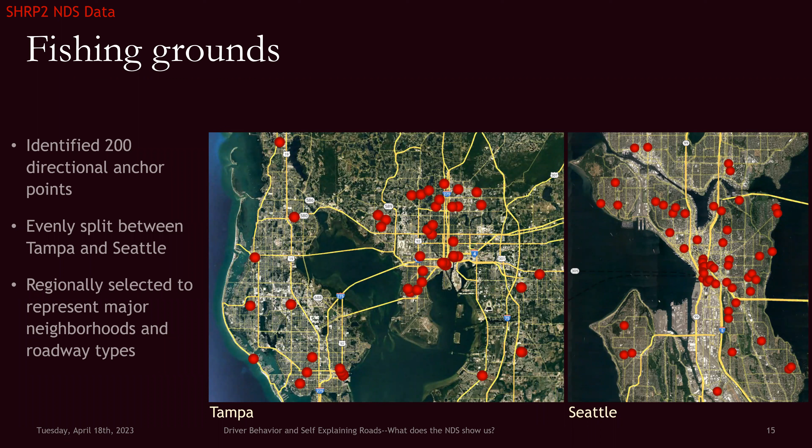And so we picked 200 locations, 100 in Tampa and 100 in Seattle. And we selected them regionally, 3 points in each major neighborhood: an arterial, a collector, and a local street. We tried to pick the mid-block as far away from signals as we can get them. 1 point in each direction, so we're not catching behavior in one direction and not the other.

And we asked them to give us the data for 10 drives in each location, the 10 that were the closest to the 85th percentile speed during the daytime, or at least the active time. We wanted to see what the environment was actually causing the driver to choose, not what the transient behaviors would be. Say if there was a pedestrian that randomly crossed their path, or if they had to stop at a stoplight, we wanted to see as close to free flow as we could get.

And they gave us 1 second of data, which gave us 10 readings during that second. And we asked for 2 attention variables. The first one was 10 times a second, tell us, are they on task or off task? If I were doing this again, I probably would have done 3 seconds, not 1. But essentially, it's eyes on the road. Are they looking at the roadway or at their mirrors, or are they looking around at something else?

And then multitasking. So they'd give us a high-level list of what tasks they were doing. And we actually counted the number of tasks. We'll talk about that in a minute. And then on a whim, we asked, are there vulnerable users present in that environment as they're driving through? Didn't realize at the time how important that would be.

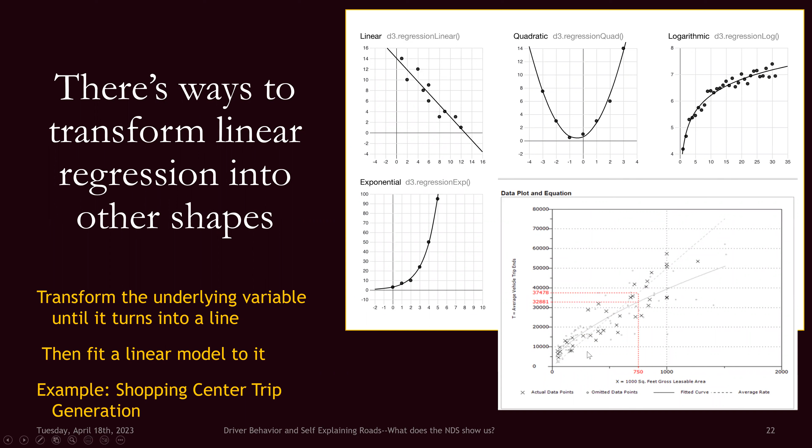But that's not the only tool in our toolbox. You can also use something called an econometric model. And these models use an S-curve. And in the most general sense, they're trying to identify the difference between someone choosing yes or no.

You can actually extend that to different levels of yes or no, but essentially you're trying to figure out whether a person, given a whole bunch of information and a whole bunch of things to decide from, they've got one choice to make, but a lot of factors that are going to go into that choice. Are they going to decide yes or no?

And so this is the kind of thing that tells you whether or not you've hit the straw that broke the camel's back. So as you go along the line, you're ending up adding up those factors. And at some point, you begin to get high enough that you go from a no to a yes. And those are the kinds of things that when you add factors together, you can see how the variables interact.

Now, a multivariate analysis is a lot like icing a cake. The type of cake you have determines the type of frostings and add-ins you're going to put with it. If you've got a very simple cake, you want a really rich, intense icing. If you've got a complex cake, you want a very simple, just sweet icing, but not nearly as complex because you don't want to overshadow the cake. And you're always looking to see what flavors would balance it out to make an overall presentation.

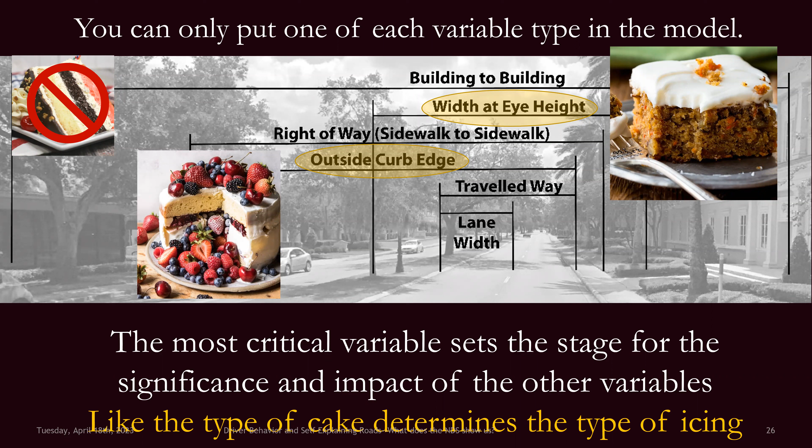So sometimes when you have a very simple variable that's the base of your model, you can actually see the other pieces that add up to it. But if you have a very complex variable that starts your model, you don't end up with anything else showing up as significant. And that's one of the things that we faced. So a lot of the models I'm going to show you next are really very simple outside curb edge models. And we're going to start with time on task.

So remember, we asked them, is the driver focused or not 10 times a second, okay, at that 1 second mid-block. And at first we thought we were measuring the driver's attention, but it turns out we were just measuring whether the driver had their eyes on the road. And the biggest clue to that is that when you have a person in the environment, a vulnerable user, the attention that the driver gave dropped just a little bit, not a lot, just a little, but it was very significant. It was always happening.

And what we're seeing here is that drivers' eyes are drawn to the people that are in the space. Now, they don't always see it, but they do get drawn to it when they do. Local streets get less attention than arterials and collectors. They also have more conflicts. And so you end up having to focus on more than just the roadway when you're in a local street. This is kind of a duh. As the roadway gets more complex, you got to keep your eyes on the road more. That's very simple.

On-street parking dropped the time on task. And that's because drivers are actually looking to see if somebody's going to jump out between the cars or if the cars are going to start moving out. And so they're looking at more than just the driving task itself. They're actually paying attention to the things on the side of the road. And that's a good thing. It's just a complex thing.

So when you're looking at this, we took every single variable and we did an individual statistical analysis for each variable by itself. So how does the drive lane width relate to time on task and multitasking? And then also, how does that variable predict whether or not you'd have a vulnerable user in the space?

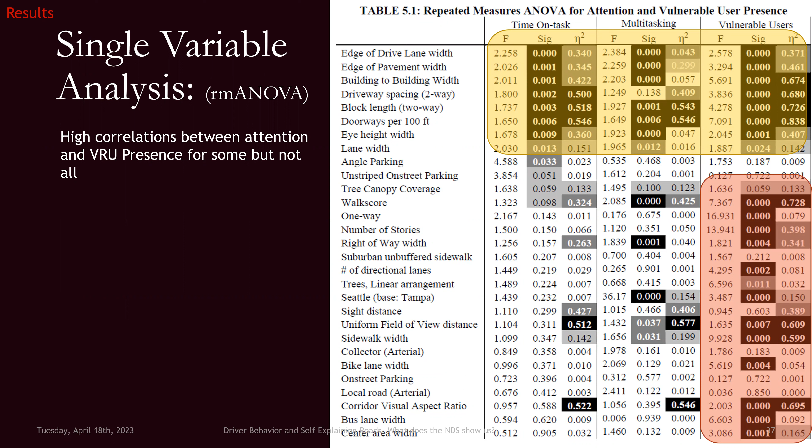And then we lined them all up, so we're looking at them all together. And there were a whole bunch of things at the top that moved together. And a lot of them were very visible, but not all of them. So there were high correlations between attention and vulnerable user presence for some things, but not for all things. Just because you had vulnerable users there when that variable was high didn't necessarily mean that variable changed your attention level. And that was really puzzling.

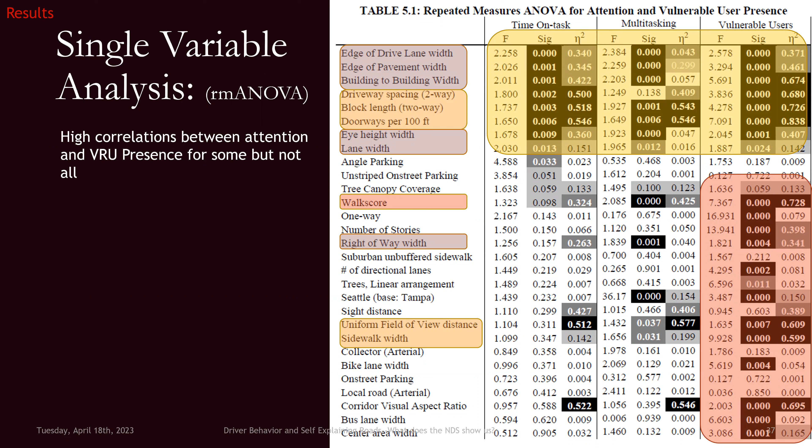So why would it matter sometimes and why wouldn't it matter other times? Things like walk score don't actually have anything to do with what the environment looks like, and yet it seems to have a really big impact across the board. So I was talking with a friend of mine trying to ponder through what all this data meant. He's a practicing psychiatrist, and he drops this bomb on me. He says, well, you know, most driving's in a hypnotic state anyway.

I'm going, we talked about highway hypnosis in the 60s, but that was a very long time ago. And highway hypnosis was really an impact on fatigue. We kind of discounted it. So what are you talking about? I know you're not talking about fatigue. What is it that you think that's important about hypnosis? Well, he said, go look up what hypnosis actually is. So I dutifully went and looked it up.

And it turns out when a person hypnotizes you, it increases your ability to pay attention to what they cued you to, but without watching yourself do it. So when the guy says, every time I say this word, cluck like a chicken, your brain decides it's going to watch for that word at a really, really high level, but it's going to turn off your ability to actually watch yourself watch for the word. And that's exactly what you do when you're driving. When you're driving, you quit watching yourself drive.

And it turns out there's two levels of watching yourself. One of them that we normally think about is something called higher order thinking. And it's very tied in with words. So you know you're watching yourself. It's very logical. It's very processed, and you remember it. But there's also a level of metacognition, watching yourself, that's called phenomenological. And it's basically watching yourself see things, but it's not necessarily talking to yourself about it. It's all about monitoring and your sensory perception. You can ask yourself, or someone can ask you in the moment about it, and you'll be able to answer questions about it, but you won't be able to remember it later.

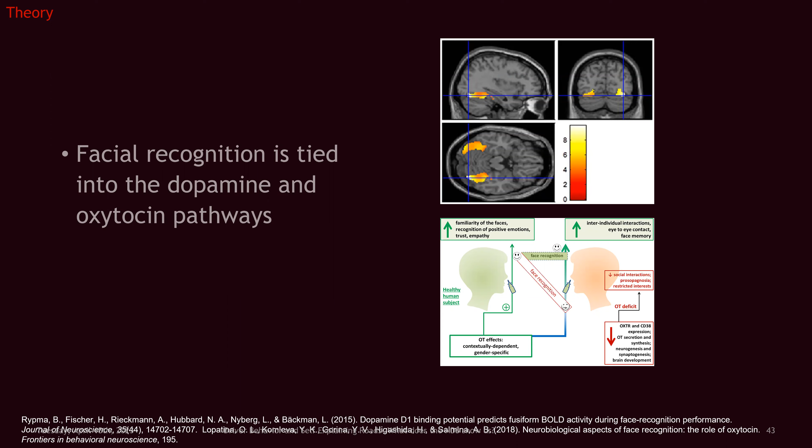You see faces even when they're not there, and we get rewarded when we see faces even before you're conscious of them. So the wave that we see in brainwave patterns that corresponds to recognizing that something is a face happens at 170 milliseconds. Conscious thought doesn't start until about 300 milliseconds. And it turns out if it's your own face, you only need 20 milliseconds to actually get the dopamine hit tied to seeing your own face.

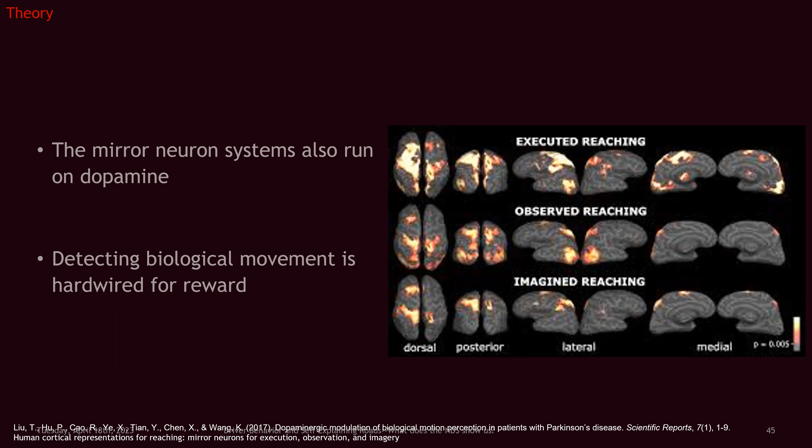That mirror neuron system also runs on dopamine. That's the system that when you raise your hand and wave it at somebody, there's a part of their brain that will actually raise a hand and wave it so you can decode what that person did. That's how babies learn empathy, because when their mom smiles, that mirror neuron system causes them to make the exact same facial expression. And when they make that facial expression, they feel internally what the mom feels, because facial expressions are hardwired. You feel the facial expression you make. And so these are very, very primitive, very biologically critical systems that all run on dopamine.

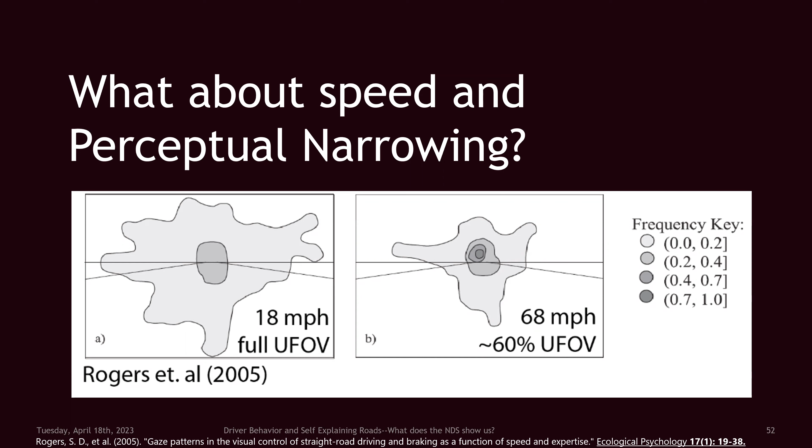So we know that the faster you drive, the narrower you're looking. You're not looking at as much of your visual field. Well, when we take this into plan view, it turns out the people who did the research never actually considered how far ahead the driver was actually looking. So if you're only going 18 miles an hour, you're not going to be looking that far in front of you. But if you're going 50 or 60, you're going to look a whole lot farther down the road.

And those shapes correspond to a different width in the roadway. So when we put that in a plan view, it turns out no matter how fast you're going, you're still basically looking at a 60-foot wide corridor. Even at 68 miles an hour, you're still narrowing your cone of vision out to a 60-foot wide corridor. That's a very interesting thing to me.

And there's a speed issue too. So if you're going too fast, it actually takes time. Remember, we said it took 170 milliseconds to process a face. It takes time to process human presence. So if you're going too fast, there's not enough time to process that there's someone there. And we think that limit is around 40 miles an hour.

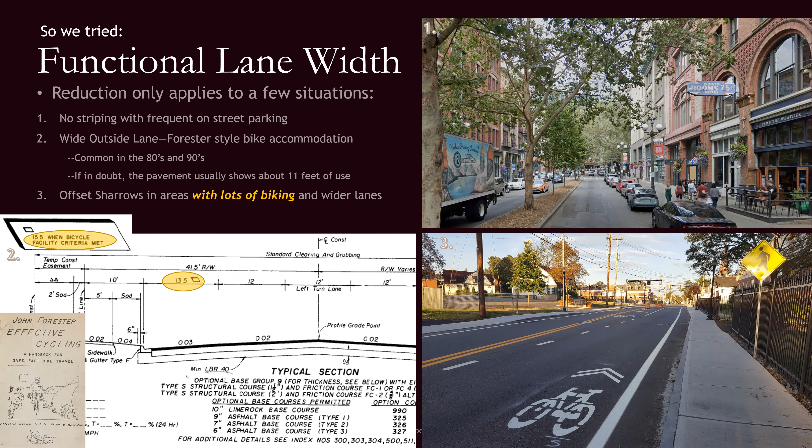So we quit doing those kinds of things very, very early on, sometime in the 80s or so. We quit doing these wide outside lanes by the 90s, but they still exist out there. And when you take into account where the driver is actually placing their vehicle, the curve now goes in the right direction. Doesn't go solidly in the right direction, but now, as the lanes get wider, we actually see people going faster, which is what we recognize happens in real life.

Now, I'll tell you, suburban drivers usually use every inch that you give them and a little more. So once you get to about 11 feet, the driver in suburban or urban environments, they're taking the whole lane. So if you're narrower than 12 feet or 11 feet in your striping, they're taking the whole lane. But suburban drivers tend to take the whole lane regardless. They're just all over the place. They really don't put themselves in one unique spot.

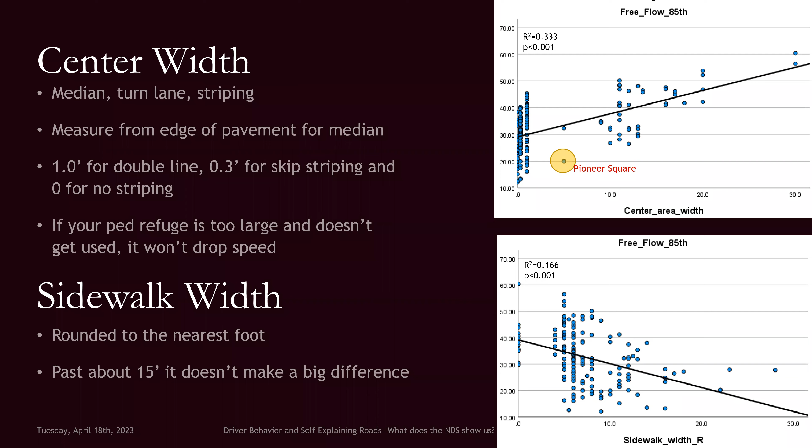In terms of longitudinal measures, we're talking here about the interaction of time and space. So how does the corridor present itself to the driver as the driver is moving along in time? Block length was the measure that made the biggest difference. And you can measure block length two different ways. You can look at the blocks that are just on the right side of the road, or you could look at it in terms of the conflicts that the driver is going to see from either side.

Well, it turns out that the right side had a better R squared in the formulas, but when we used them in the testing, both directions actually worked better in our back-end testing. I tend to like bidirectional, counting what the potential conflicts are more than just counting what's on the right side of the road, at least for block length. In driveway spacing, it probably works the opposite way, but in block length, you probably need to think about what conflicts the driver is actually getting to.

Some of the things that we saw in the testing were that most signalized driveways do actually act like a side street, unless it's a signal for a school, and then people ignore it entirely. A lot of the firehouse signals get ignored too, because they're just not activated often enough for a driver to worry about whether or not they're there. That's why you do the extra signaling in advance of those firehouse signals, because people will blow right through them. They're not used to actually seeing them activated.

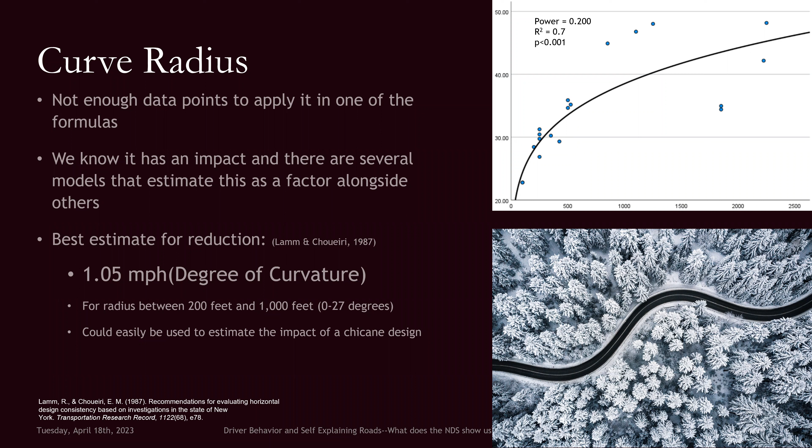I don't have enough statistical strength to put it in my formulas, but it's one of those things that from a physics standpoint, we know the mechanics, we know it's going to work, so you can stick that in the back of your head.

Now, again, I want to remind you that there are people behind all of these. So every single variable that we've been talking about, people really are foundational to that variable. We make a lower posted speed if we think that there are going to be people there. That visual width of the corridor is all about whether or not there's going to be enough people in the space for me to see them. In a small enough space, I can actually physically see them.

Interruptions are often because of people or other vehicles. So those are also really people oriented. And an urban environment is going to have more people in that environment. So every single one of these variables has their own unique impact on the way speed operates, but they all come back to people.

So we tested 3 different equation types. There's a kitchen sink model where you just build as big a model as you can that makes sense and see what matters. And a lot of times you come up with some really interesting things. If I left things like the visual corridor width or the doorway density in those models as I built up the model, they always popped up first and they always stayed in the models the longest.

A scalable model is where we took out the variables that we knew you couldn't use in GIS. And so if you've got only GIS ready variables, what kind of formula can you get? They're not going to be quite as accurate, but they do still work. And then of course, you want to have a back of the envelope projection. So something that's simple enough that if you're standing in a public hearing and you need to give a number off the cuff to a politician, you need to have a number you can give them. We tried to create equations that would actually work that way.

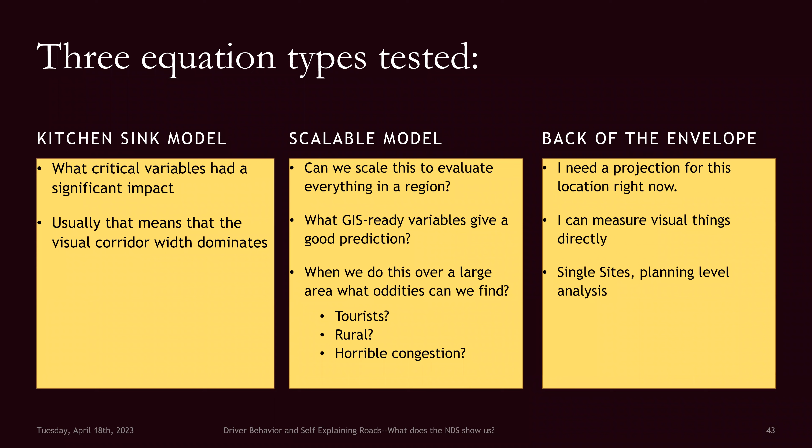So trade-offs, as we were creating all of these equations, and I've done literally hundreds of them now, so I kind of know how the variables interact. In terms of the human presence, vulnerable user probability works the best. And that's good news for me because we really do believe that the likelihood of having a person there is the biggest impact on the way people drive. It's also the hardest thing to measure. So since that's hard to measure, doorway density is a little easier to measure and it gives good results. Not quite as good as probability, but it'll work.

Walk score doesn't change speed as often as we would like it to because it captures the land use mix, but not specifically what's going on in that individual corridor. It does actually matter sometimes, but not nearly as often. It's quite rare that it does.

In terms of other trade-offs, the visual width takes up an awful lot of space in that equation. So that little visual tunnel that people are driving down accounts for a lot of other things. And so if I have to take that out of the equation, I have to replace it with multiple variables, things like the number of lanes and the width between the buildings, the area in the center, the sidewalk width. All of those things are replacements for what is the real variable, how wide the corridor looks.

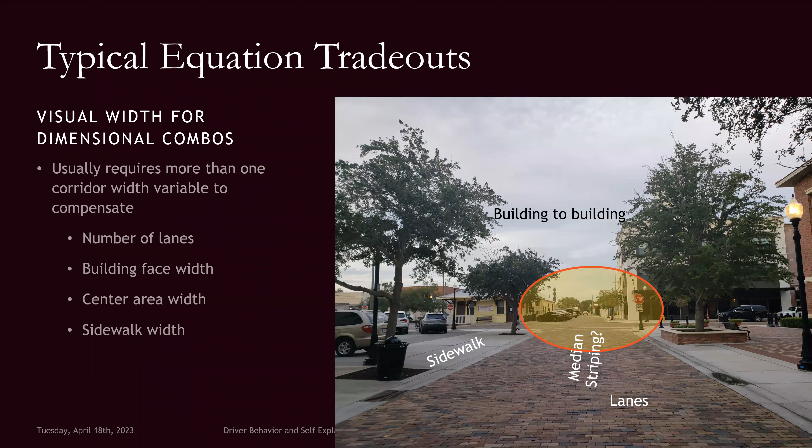You could trade out vulnerable user probability for sidewalk width sometimes. You put wide sidewalks in the places you expect to see people, but you need to think through how well those sidewalks are actually being used. If you just throw a sidewalk in that's really wide, willy-nilly for no reason, and you don't have people there, that relationship isn't going to be as solid.

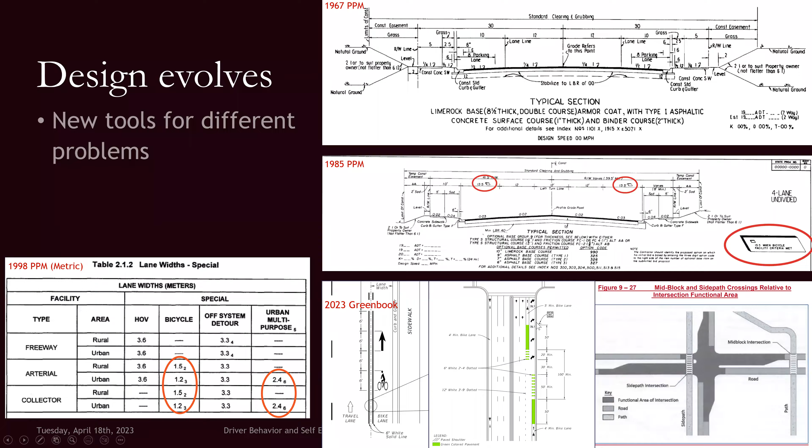But the research basically indicates there's really 2 approaches to managing our drivers. We can use a brute force approach, or we can shape their behavior. Brute force uses the laws of physics. Shaping uses all of the social and psychological principles we've talked about. Brute force is always in the roadway, but shaping takes into account everything that's around the driver. Brute force is a very spot-specific kind of treatment. It works where it works and nowhere else.

When you're shaping the environment and shaping the driver's behavior, everything in the environment speaks, but also it speaks for the length of the roadway. It's not just the one spot. You get an impact over the length of the road. Brute force is also usually very speed specific. It doesn't change the way people pay attention. It doesn't change how cautious they are.

They slow down for the speed table you gave them, and then they speed up in between, and they're not paying attention in either place. They're trying to make sure they don't ruin their suspension. They don't care what's happening on the side of the road. Shaping gives you a speed control, but it also changes the driver's attention and awareness, the focus they have looking for vulnerable users.

When you use a brute force approach, there are almost always negative consequences. When you force somebody to do something, you're going to end up with them pushing back. Not only will they adjust for their speed in between those treatments, but it's going to change your emergency response time. There was a study in Seattle that showed you're losing as much as 6 seconds for every single speed table. And if you have to space them at 350 feet apart and you have 10 of them, you've now lost 60 seconds on your response time.

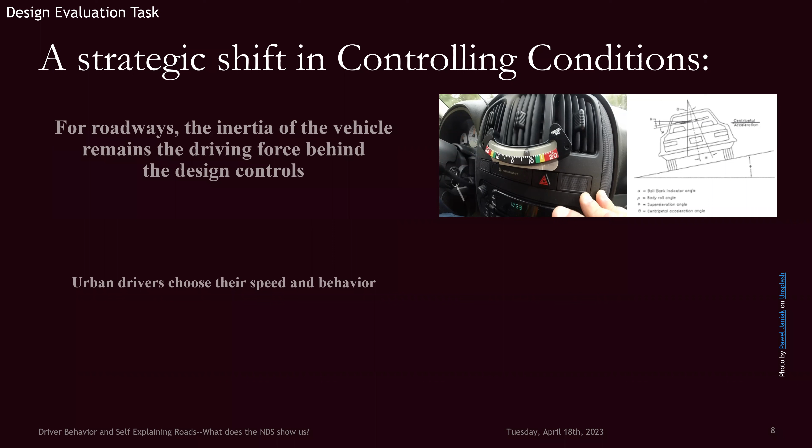When you're thinking about a roadway, the inertia of the vehicle still matters, and it's still going to be the critical factor. But an urban driver is going to choose their speed and behavior based on the risks that they believe are probable in that situation. So if they don't believe they're going to interact with a pedestrian or cyclist in that space because they can't see them, because they're too far away, because they've never seen them there before, they are not going to respond. So they're not going to slow down. They're not going to be looking for pedestrians, and they're not going to be safe. So you need to pick one or the other.

I went through the standards with this in mind and basically came back with this as our guidance. You can have a pedestrian integrated design where you integrate pedestrians and bikes into the corridor successfully. Or you can have a separated design where you separate those pedestrians and cyclists outside of that corridor and give them buffering and protection. But you can't do both in the same space. And the logic behind this is that if I can't guarantee that the drivers expect to see pedestrians, I can't guarantee they're going to change their behavior, and whoever's in that space is not going to be safe. So that puts you on a continuum between an integrated space and a separated space.

So if you have a roadway, which is a separated space, a clear zone strategy makes a lot of sense there. If the flows are going so fast that if a driver hits an obstacle, the driver might die. You're also going so fast that if the driver hits a pedestrian, the pedestrian absolutely will die. The chances of a pedestrian surviving at 40 miles an hour are 50-50. So anything above 40 miles an hour, and most of the pedestrians that get hit are going to die from that. And a serious or fatal injury, you're looking at 75% at 40 miles an hour. That's a pretty serious break point.

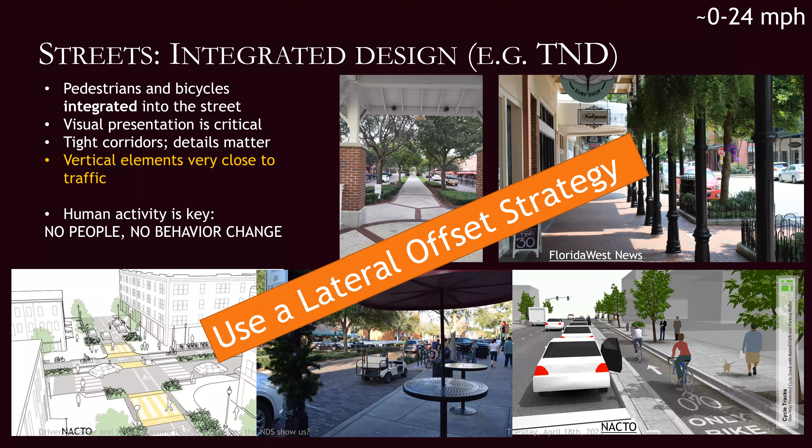The key factor is, though, that if there is not regular human activity there, the behavior is not going to change for the drivers. They won't slow down unless they actually see people there regularly. So the strategy involves making sure that your land use is appropriate to that. You're actually going to have people there regularly. Doesn't have to be all the time, but it does have to be consistent. Use a lateral offset strategy. So no breakaway, but you can put things as close as you want to the roadway.

Now, I'm going to take a quick side trip in terms of access management. And this is speed management 202. So if you are trying to keep your speeds down, is access management your friend or your enemy? Well, every time you shut off a block with your access management strategy, you double your block length. When you double your block length, drivers are going to go a lot faster. So going from something like a Florida class 3 access management to class 5 changes your speed somewhere between 3 and 5 miles an hour. If you're going from class 5, if you've got a 660-foot spacing and you go to a half-mile spacing like you'd see in a class 3 or class 2. So if you're going from a class 6 or 7 to a class 2, that's a 10-mile-an-hour difference.

So do you throw access management away? No, we don't abandon that, because there are going to be places that you do need to have it. If you've got a high-speed arterial corridor where you're optimizing your flow because you've got a lot of volume, you need your access management strategy, because that access management strategy is keeping you from vehicular problems. You just don't need to have people there. You need to be moving those vulnerable users out of that corridor. If you're in a walkable space, those short blocks are a gift.

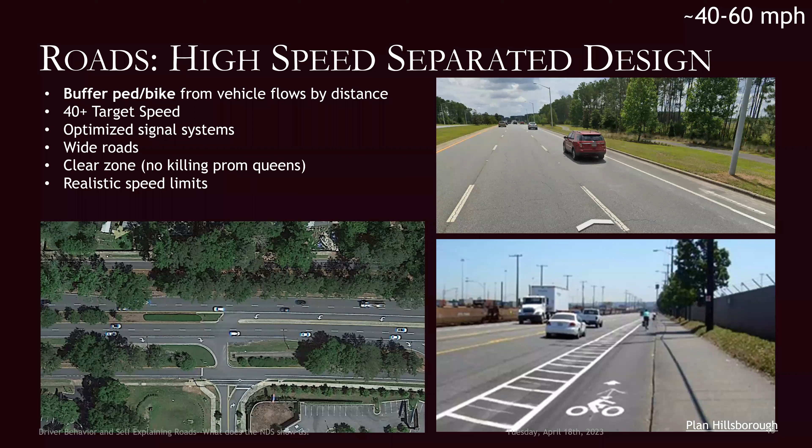This is just the way things are. So we put a realistic speed limit on these roadways, and we try to find a way to move vulnerable users elsewhere. Okay. So problems: we need a transition strategy, and the goal is to either transition things up or down. The worst place to be is in that 25 to 40 mile an hour target speed. So you need to choose whether this is going to be a street or a road over the long term. You may not be able to change it today, but you need to think about what you want it to be over the long haul.

This road, a 6-lane road with a beautiful 7-foot buffered bike lane, posted at 45 miles an hour, is not right. This is just not sane. So we really need to rethink these kinds of patterns. It would be much better in this case for you to actually move that curb line back over and give yourself the room for a full multi-use path. We do need both of these types of roadways in the system. We just don't necessarily need both types of users in the same right-of-way.

So if you've got a corridor that you've decided from a policy standpoint needs to be a street, and you're going to try to move people down in that street, the strategy is to reintegrate those people into the corridor. And the first thing you're going to try to do is to shift the land use. You need to have enough land use mix in that area that it makes sense to bike in the place. So if it takes 5 miles to get to the closest shopping center, you're not going to ever be able to transition that facility down, because you're never going to get enough people there for drivers to respond to that. So the resolution of your land use mix needs to change. You need to have origins and destinations that are within at least 2 miles and preferably within 1 mile.

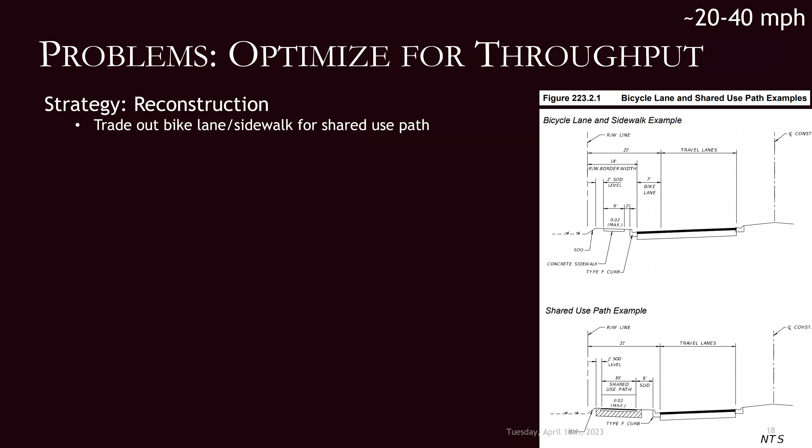Here's another way. This is a corridor here in Orlando. It's Mills Avenue. It's a very high-speed optimized corridor, 4 lanes wide with dual lefts in most of the intersections and a fairly short block length. So in theory, you might actually be able to transition this down. You've got some land uses that are very close to the roadway, but a lot of the newer land uses have parking lots and they're separated back from the roadway. And so it's an iffy, and it's a major arterial for the entire region. So you're going to have an awful lot of vehicles in this corridor. So strategically, in theory, you could transition it down, but you probably don't want to because you need the throughput.

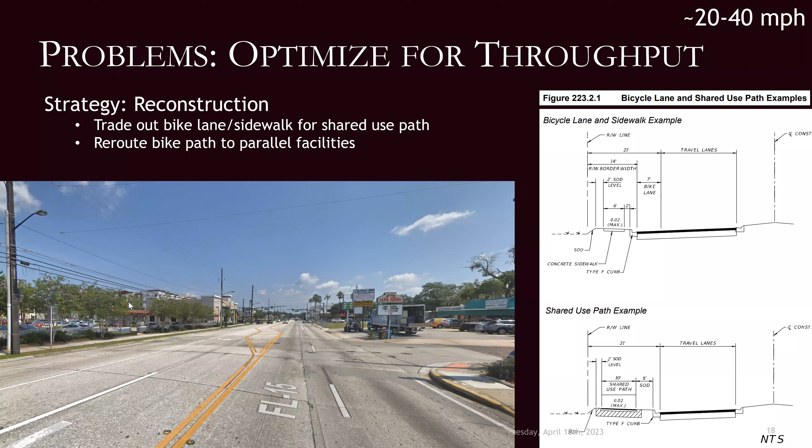So what they did instead was they rerouted the bike path over to a parallel facility. And you see this area over here that has the parking lot. There is a Fresh Market behind that parking lot. So a decent sized grocery store, and an apartment complex and a whole bunch of restaurants, right? So what they did is they moved the bike path behind the grocery store. This is part of the Orlando Urban Trail. It's a very heavily used bike path, and it has a very long connectivity, almost 10 miles worth of connectivity.

And they've moved all of their bike traffic behind the building with bike connections from that bike path all the way up to the front of the building. That puts your bike traffic closer to the entrance of the land use, where you want it to be. I mean, the bicycle doesn't want to have to cross an entire parking lot to be able to get to the front of the store. So you've already got a better location for the bike path, and it's away from the high-speed corridor where it wouldn't be safe.

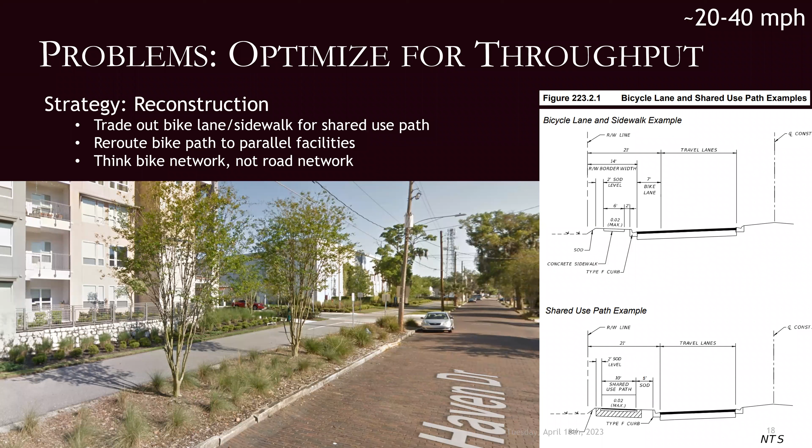This is a brick street. So the people on this corridor aren't going very fast at all. There's already on-street parking there. And so in a lot of ways, this is kind of an ideal situation where you've taken a very high-speed corridor that had multimodal facilities, and instead of putting all your eggs in one basket, you've moved them out and relocated your pedestrians and cyclists over to a much safer location. So the strategy here is to shift vulnerable users and optimize for speed in the place where you've moved them out of.

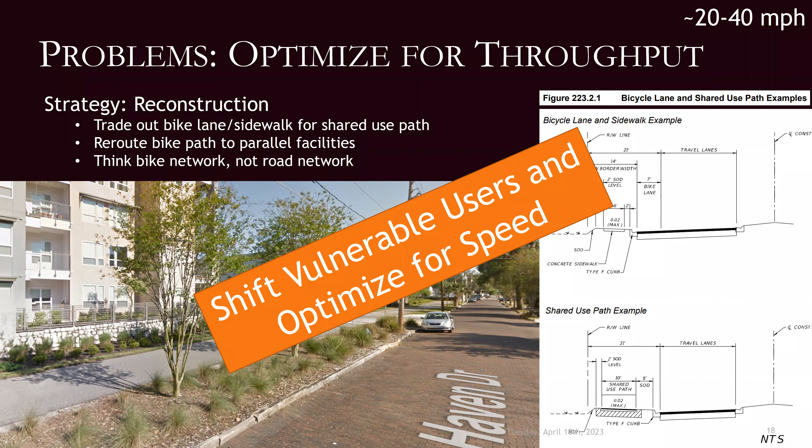Now, you can do that a dozen different ways. Mid-block crossings are going to be very useful. And in those places where you shifted them out of the corridor, you still need to provide places where pedestrians and cyclists can cross. And the idea is to think about these major high-speed corridors as a river, not a stream. So when you have a major river running through your community, you provide bridges. And these micro integrations separate your conflict zones out from the regular roadway and create a ford for the river. It's basically a bridge.

But to make that bridge work, you're going to need to make it as obvious as you possibly can. And that means raising your crosswalk up to the level of the sidewalk and creating a speed table. Giving a pedestrian hybrid beacon or a rectangular rapid flashing beacon, an RRFB. Making sure that that crossing is as obvious as possible. Putting the transit stop right there where the crossing is, so that as people are crossing, the drivers actually see the reason why they're crossing, that there's an actual physical transit stop with a structure there. Those are really important. Bonus points for artwork. So street art.

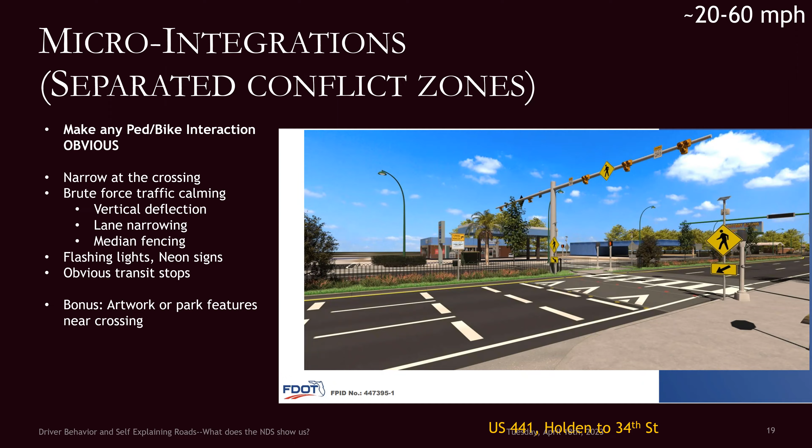Now, I will tell you, this requires an FDOT design exception to use it on a state roadway. However, there is a massive benefit in terms of safety. Don't abuse it. So are we going to use integrated everywhere? No.

Walkable scale is visually local, and human scale is geographically extraordinarily small. Your response times are going to drop dramatically in those urban spaces, but you'll wear your drivers out. So don't do that. So how small? Quarter-mile blocks. I mean, an urban space is a quarter-mile in diameter. This is my downtown that I just showed you.

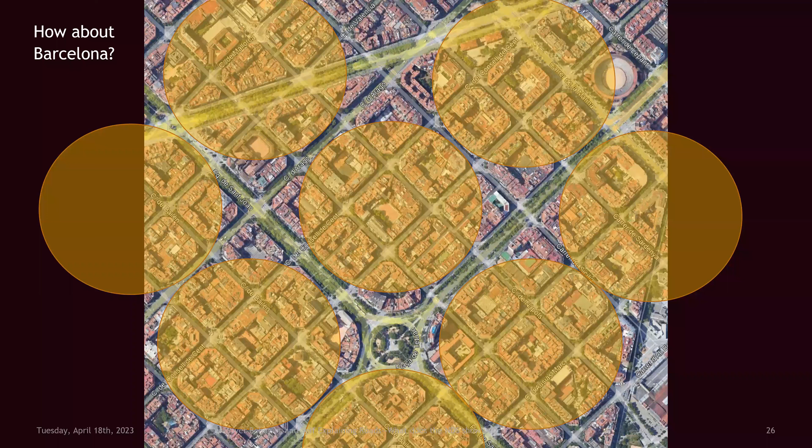Winter Park, we have 3 of them in a row, but they are 3 separate areas and they each have a different character. What does that look like in New Orleans? There's all kinds of them. Each one has their own mental anchor. Guess how big the super blocks are in Barcelona? Same size. Gee, happens all over the world.

And those transitions are absolutely key. So you want to give a space transition when you're going from an integrated space to a separated space. You give them an area where they perceive that the context is changing, and then a place where you can begin to see things like gateway treatments before you get into the area where you're integrating things in.

If you have an area where you're expanding your integrated space, all of a sudden you have 1 quarter-mile block and you need to add another one. Well, maybe you add in another gateway treatment at the end of that other quarter-mile. And you do transitions in between each of those clusters.

So as you go from one cluster in Winter Park to the other, there's all of these little cues. You've got these major street furniture things that are going on in between the clusters. You've got a land use change. You've got a major park in that center area. So you can see that you've gone from one neighborhood into another.

The transitions over time are just as important. When you're retrofitting a corridor, you're going to have to actually change the land use. That means you need to get your pedestrian systems very consistent throughout the corridor. They have to be ubiquitous. And you're going to have money streets and movement streets. That main drag down Winter Park has a lot of street fronting businesses. That's where Winter Park makes all its money.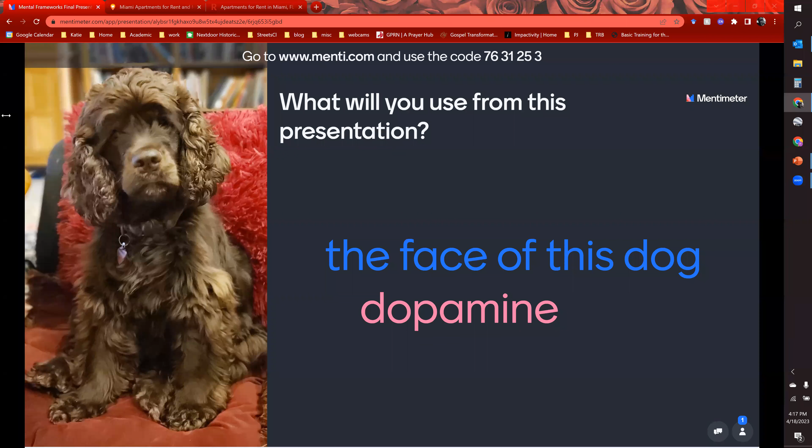I think I have some concerns with the AM statement. Speeds increase due to congestion. They increase closer to the posted speed. It doesn't increase the percent of people speeding. Good access management is critical for peds and bikes. I am on A1A and Jacks, and the median opening where vehicles stage and peds run across with skateboards and dogs are a big issue. Okay, so it's an interesting point. I was talking to one of the designers, one of the ped bike folks at FDOT.